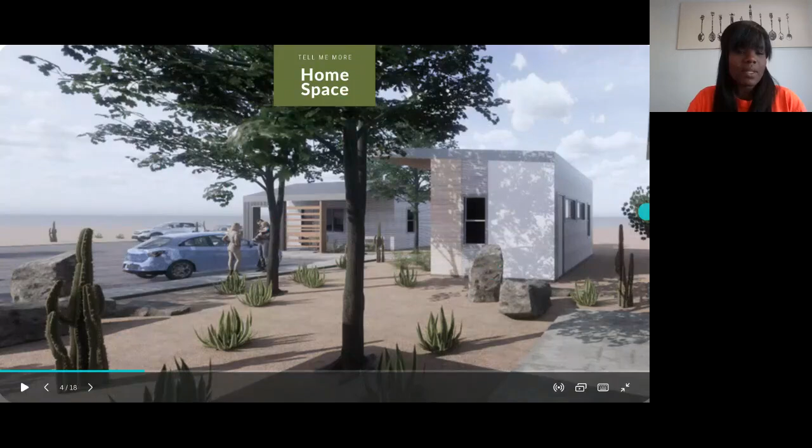This project right here is one we are working on. It is another veteran home. We just put it in for pictures, but we are breaking ground on that as well, coming soon. So we can go to the next slide.

So the project we are currently working on started off as a tiny house community, but the city realized they wanted a little bit more space in the home, so they're now micro homes. If you don't know the difference: a tiny house is 100 to 400 square feet, and anything above that, between 400 and 600 square feet, is considered a micro house, but they fall under the same guidelines as tiny homes. So that's the difference. We went from originally being sought after for a tiny house, and because of the additional requirements the city needed to meet, we went into micro housing.

This was actually a contract that went out - a request for proposals, a request for qualified vendors. I have to say I am very thankful to have been awarded this contract. Never thought in a million years, because I always give the foundation for the contracts, the resources and preparations, and then someone's friends always get it. But it's okay, I've never been jealous of that situation. I just feel like, hey, at least we're getting tiny homes or housing done. But this time being...

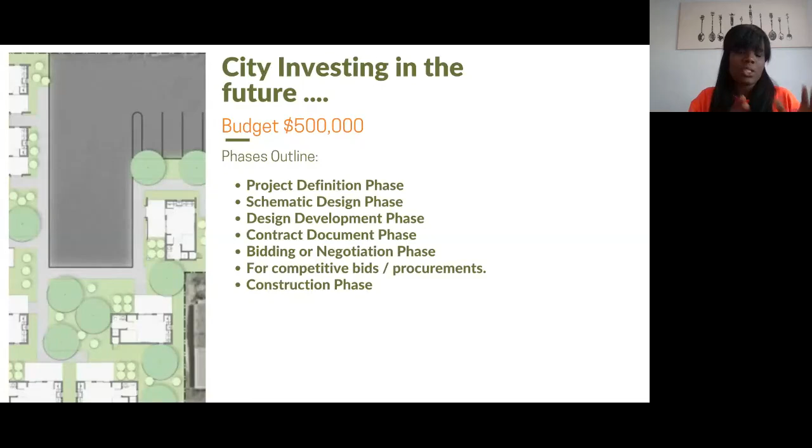So this is the lovely site where we are doing this. The city wanted to look at sites around their area that they could repurpose for housing. So this is actually a parking lot that is being repurposed to build these homes, in hopes that when this project goes through, we'll be able to build more homes. This project is on a 45 by 450 square foot parking lot space.

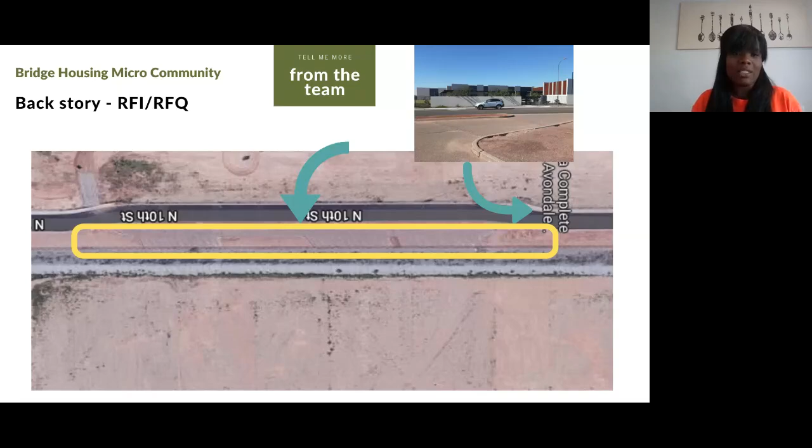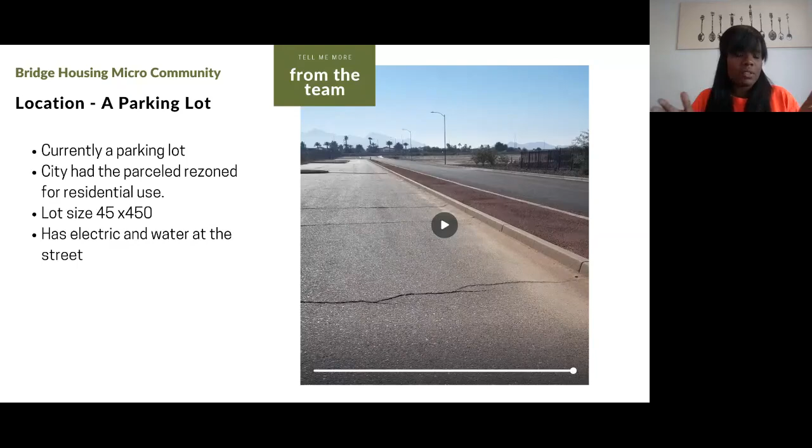It is currently a parking lot across the street from their resource center. The people going through this pilot project will be using the resource center, and then they'll be living in these homes as the city sees if this is financially viable for them to continue on. The good thing I love about it is that we're taking an existing space nobody's using and creating housing. It's 45 feet wide and 450 feet long, so we don't have a lot of space. We need to use as much space as possible on the project to create the small units.

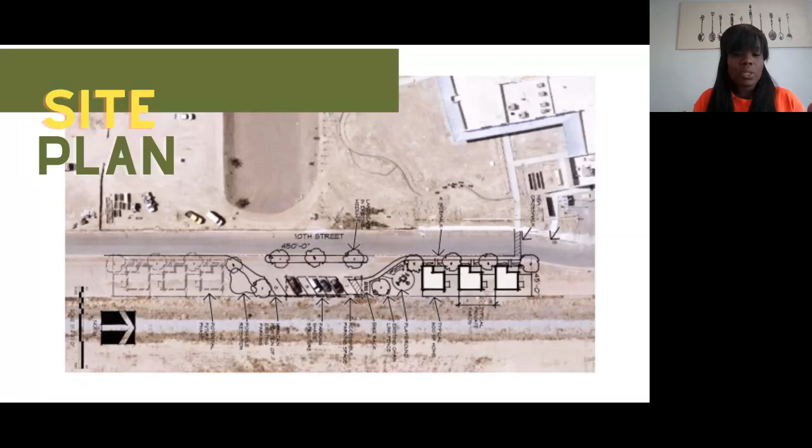So with the units on the site, there's also parking—we're reusing the parking lot, saving as much of the previous parking as we can and creating parking on that, plus creating some more natural resources on the site.

Keep a note when you're doing a site on wheels, because I'm doing one on wheels and one on foundation right now. You're going to need an architect, a civil engineer, and MEP, which is mechanical, electrical, and plumbing engineer—all of these engineers put together—and then you need a structural engineer. So depending on if you're going to do yours on wheels, you should already have a structural engineer who engineered your homes, especially if you're planning to get it permitted. You have to make sure a structural engineer stamped the plans.

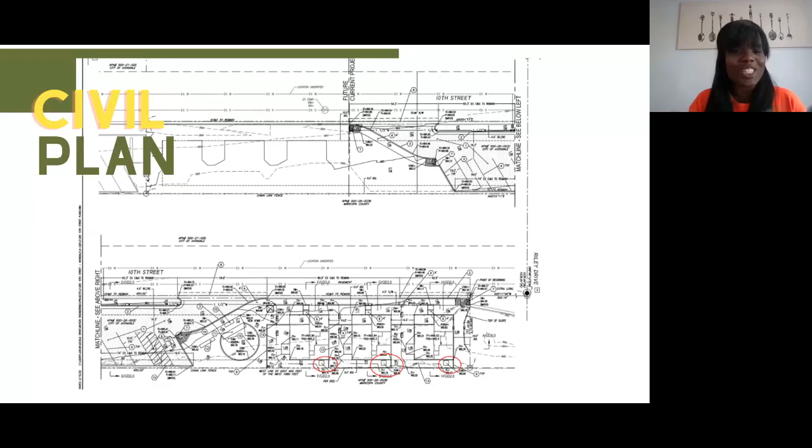That's for your own safety too, because if you're doing it yourself, go ahead, good for you. I would still do it if I built my first, and I had a structural engineer give me something, because I didn't want to be driving down the street and my house flips over, and then what? I'm out of a home. So we want to make sure.

But people don't understand this cost, so I'm going to tell you what the cost was for all the plans. And this wasn't because it was the city—we actually cut our prices. It was about $40,000 just for plans: the architect, civil engineer, the traffic engineer, the mechanical, electrical, and plumbing engineer, the structural, and all of these engineers to make this plan come together. It could cost money. Now there are some companies that do it all in one, and they can lower your price, but I'm just going to be honest with you.

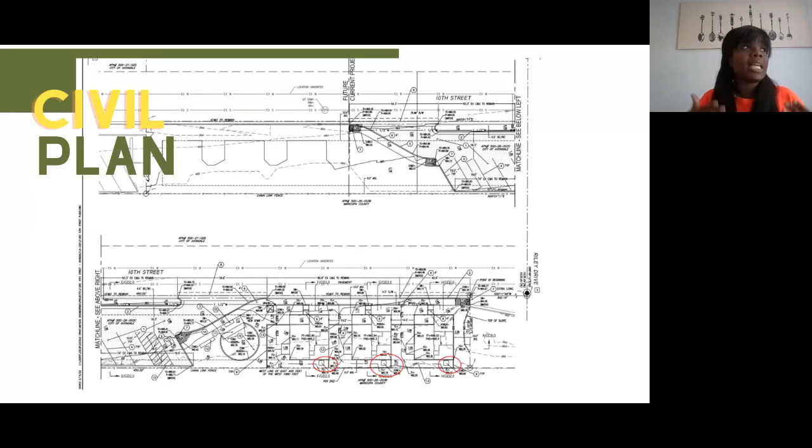People really think that I'm watching HGTV—no offense to the HGTV producers—but it's not $10 to build a tiny house or build a community. No, it's not. Even if I was doing a single home, I would most likely have to get almost everything. I definitely would have to have a civil engineer. Mechanical and electrical can tend to go under the architect if it's one small home, but the city might come back and tell you it needs to be engineered, so just make sure that you understand that.

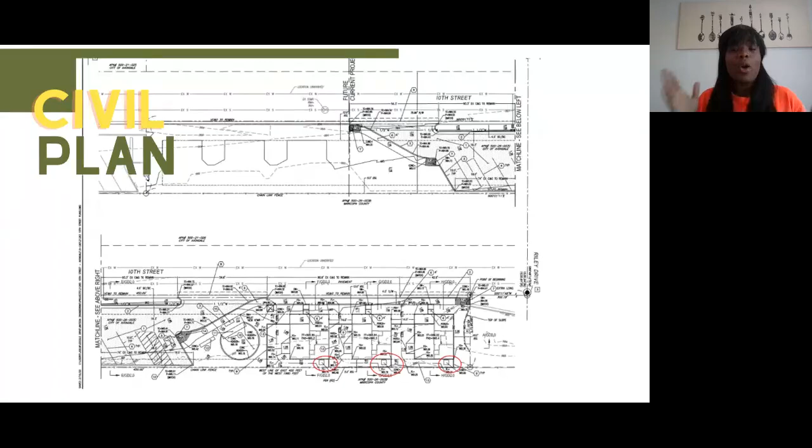That's the floor plan. We were able to get in under 600 square feet—about 590 altogether. It's a 2 bedroom, 1 bath micro home. It's an individual all by itself, not a condo. It was structured out so we were able to fit in all the small appliances—everything doing 3 or 4 things inside the home to make sure that we could.

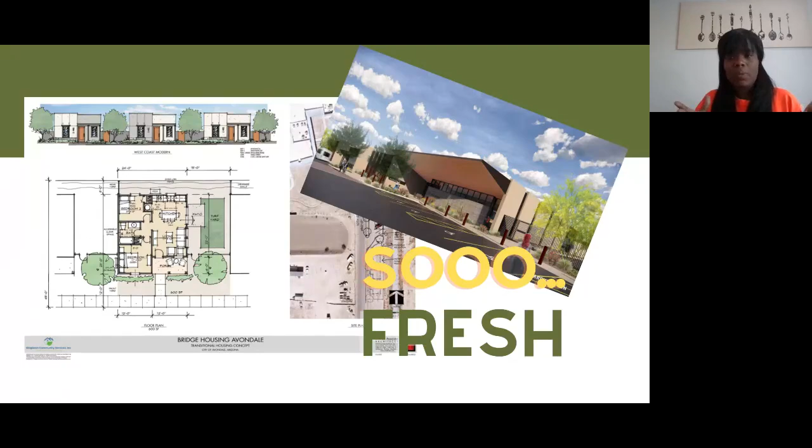So you can go to the next slide. Oh, there it goes, it got bigger. Did it come up? We must have skipped that. There it goes, to show you a little bit bigger how much space that we have.

We are able to get a queen size bed in one of the rooms, and the other ones we made it to where it'd be a bunk bed. We do have a high ceiling, so if you want to create the highest amount of space, even with a small footprint, that helps.

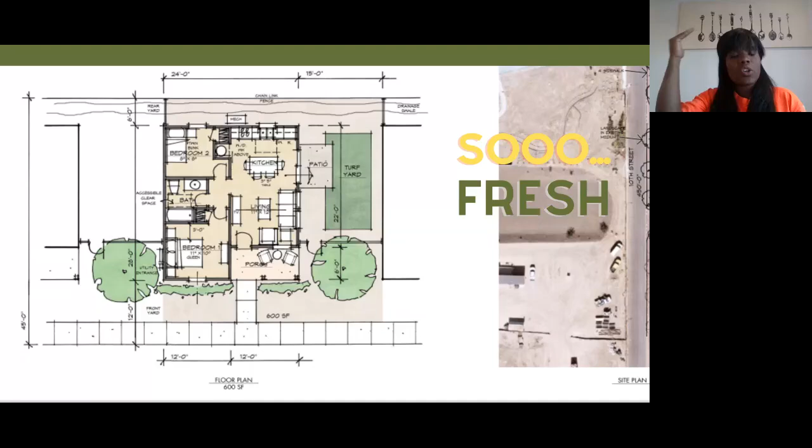We have a 100 square foot home with 13-foot ceilings, well, 12 at the peak, but no one knows it's a 100 square foot home because of the high ceiling. You can also use your high ceiling for creating a loft, which adds that extra housing space. You can have a loft, a rolling loft, or a couple of different types including hideaway lofts. At that height, you definitely can have your loft, and the height creates so much space in the room.

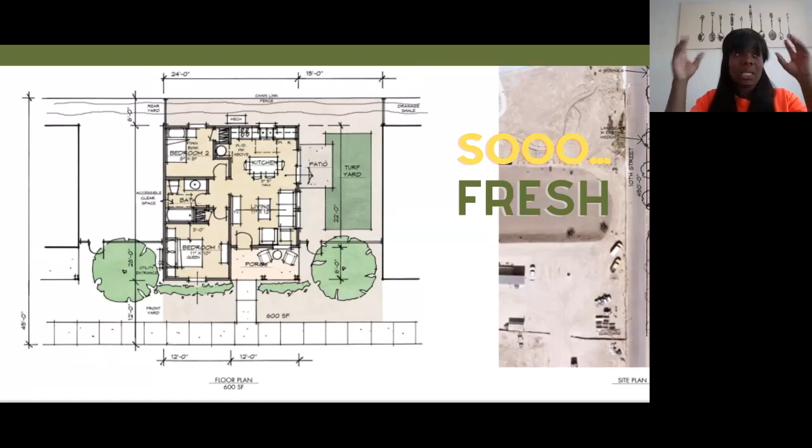Like one of our tiny houses on wheels, it's just straight up, we don't have all these stairs and things in front of it. When people walk in, they're like, oh my God, it's so much space, but it's really just creating a center height that opens up your space when you first walk in. This one actually has a 10-foot slope down ceiling, but it's completely open. We have no attics and no ventilation going through it because of the way we use our wall systems, which I'll show you on the next slide.

This is the wall system we use to build, called Wally Walls. It's a partner company of ours, and with it we can build a tiny house. The size we're going for right now, we can build in 4 to 6 hours, erect it, and go about our way.

In less time actually, but because people are new and learning it, we always give extra time. When we know the system and have our workers, you can be done with this in like 2 hours, and have 3 homes done. I do love the system because it's insulated panels injected with graphite polystyrene, so you can run over these panels but they're so light to pick up. This home right here, one of these homes, I was building it with another person, so it was just 2 of us building it.

These were very high, like 18 feet going up at the cantilever, at the slope of the roof, the end of the roof was about 18 feet high. Not the best for managing the height, but they're very light, and it means we don't need an attic, because the insulation goes straight to the roof and ceiling, and we can build quickly. This project, we have 11 weeks to build, so we have to be in and out, using the system.

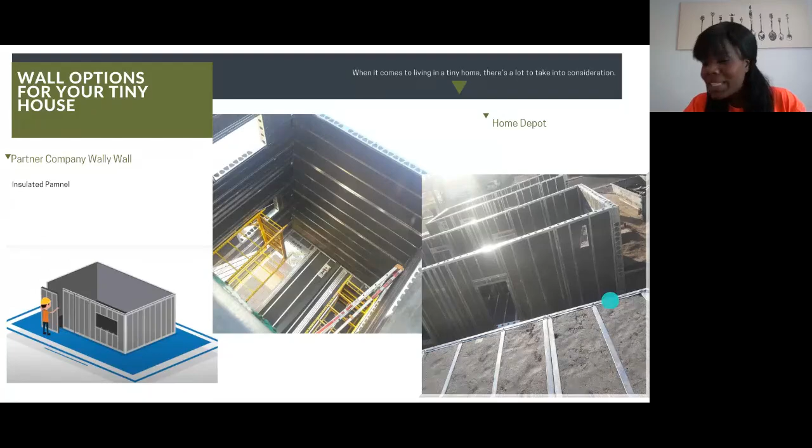So, go ahead. You can go to the next one. I don't know what my time is. I hope I'm not rushing through this because I'm trying to get through it.

So another thing that I love that they're allowing us to do is we can use a lot of the natural resources. So I always have most of my projects use pallet wood and burnt wood to maximize, especially if we're going for a more modern look on the site. So it's actually going to have wood and stucco at the same time.

We were able to convince them to let us use some pallet wood on some of the fencing and some of the accent walls and things on the property. So it's going to be really nice. And I just love using pallet wood, especially if I create some type of fencing or some type of living environment or parking area - it's just a good source of resource. So go to the next.

I try to put in some of the mechanicals this time because we always talk about the difficulties, but I also want to talk about building and understanding. So you can go to the next slide.

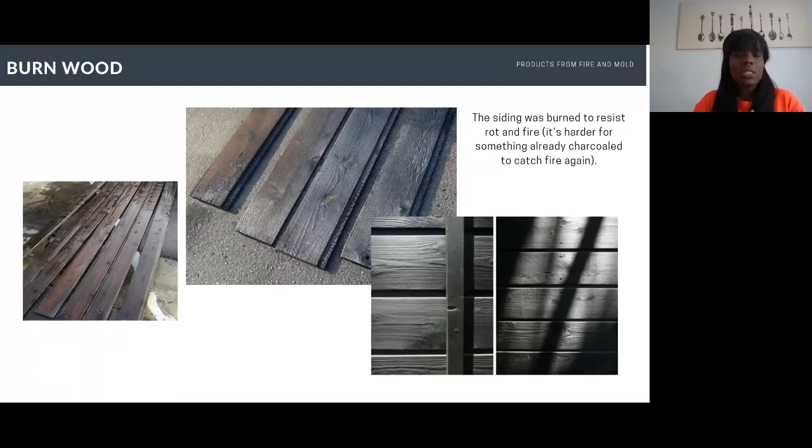We're going to use 3 heads. So in your mini split, you'll have 3 condensing heads that'll be in the house. There'll be one in each bedroom and then one in the main part of the house. And that's all it needs. And it's going to be 25,000 BTUs.

And if you don't know what that is, that's basically just the pressure, I believe, or how much pressure it can bring into the home. If I remember, I'm probably wrong, but something to do with that. So it's just based on your house size. So with this square footage, we actually are using too much, but we'd rather have too much than come back.

And that's another thing good with Wally Walls - we're using it in the roof and the walls. We're at 42 in our insulation. So our R-value is at 42 instead of the regular 19.

And some of our homes right now, they don't even use the AC until later in the year, because after a while of it just being hot all the time, then they'll use it. But the bills are nothing. And I think we get charged more on the actual services and taxes than we actually sometimes get on the bill for the heating and cooling of the home.

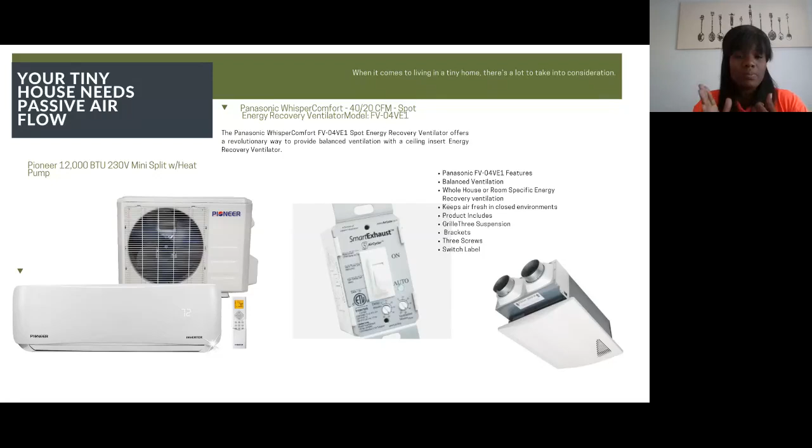So you can go to the next one. I hope this is helping you. I just wanted to be a little bit more detailed on some of the things.

So the groundbreaking schedule of this site - we started in January. So we had our notice to proceed in January. We have gone through the plans and design phase, which is a back and forth phase of building your plans and how you want your community design, securing any funds. So they had a budget, but we needed to secure more funds. And so in that process, that's what we've been doing in that time, a lot of meetings with the city.

From May to July, that's where we're going to be doing our site development. So by next month, we are breaking ground on this project. And we are due to be done July 30th, with our opening in August. So the final inspections, everything should be completed by August.

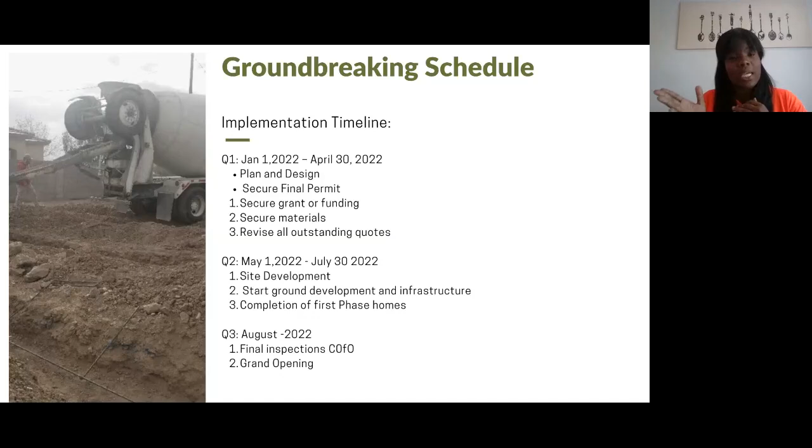I like to share this with people because I get so upset when they talk about taking a tiny house, even one on wheels, because these are similar prices. If you're going to set your house on wheels on maybe a semi-permanent foundation, or just set it down - I have a house right now I'm about to set out here - people never tell them the truth about these costs, and that upsets me. But these are your true costs when you're going to build.

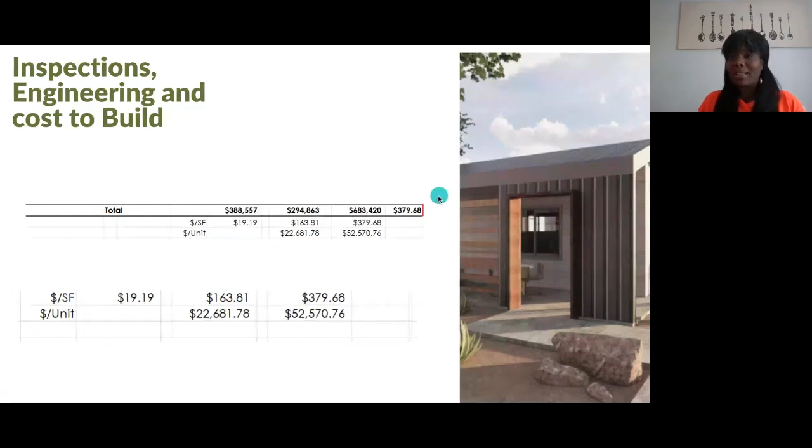So I think that I don't know if this is my last slide, because then I can take questions or we can run back over the slides. But I was trying to stay within this hour, and I wasn't really good at it.

Okay, so go big, go tiny. That's our slogan, or was our slogan. I'm semi-retired, but now I'm getting this request again. I'm supposed to speak for FEMA if they still have the tiny house as an affordable option, and I want to be as honest as possible.

It's affordable in a sense, but we don't really have standards to run off of. And right now there's this battle between all these organizations trying to create these standards. I'm on the standard board for ASTM, so I'm not beating anybody down.

But I really wish we had some standards, because it would be a lot more affordable for us. Just standards on making sure we're having good structural designs and water systems, because if I start building and then go to the city and they say, no, we want the steps like this, or we want you to do the water this way - the city doesn't have any guidelines or standards. Even on foundations, we were writing the codes for the foundations here.

So anyways, I'm going to tell you something. I used to be heavy in the homeless community - heavy, I mean I lived and breathed the homeless community, going out at night and doing the best I could. And I spent millions in that community.

And when I really started getting involved politically and looking at financials and why we weren't coming up with solutions to housing - which we had all the solutions, all the reports, we did all the surveys, millions of dollars of surveys - we actually spent the money we could have used to end homelessness on surveys and other government programs.